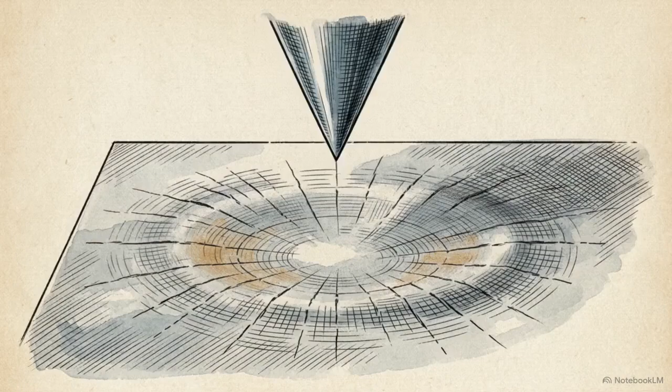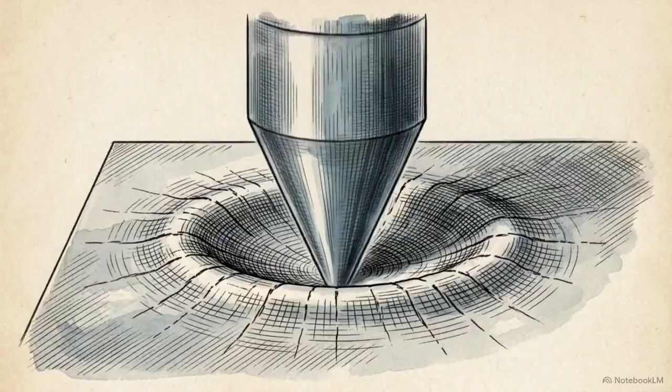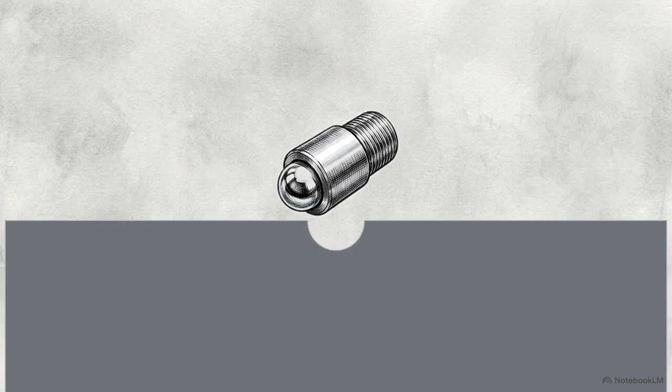In material science, hardness is defined strictly as a material's mechanical resistance to localized plastic deformation, its ability to withstand being indented or scratched. For decades, traditional testing frameworks like the Brinell and Vickers protocols were the standard methods used to quantify this resistance. These legacy methods operate by driving an indenter into a material and then calculating hardness based on the two-dimensional surface area of the resulting crater left behind.

Measuring that area requires secondary optical analysis. A technician must place the material under a microscope, measure the precise diameter of the crater, and calculate the final value. This makes the process slow, tedious, and highly dependent on human exactness.

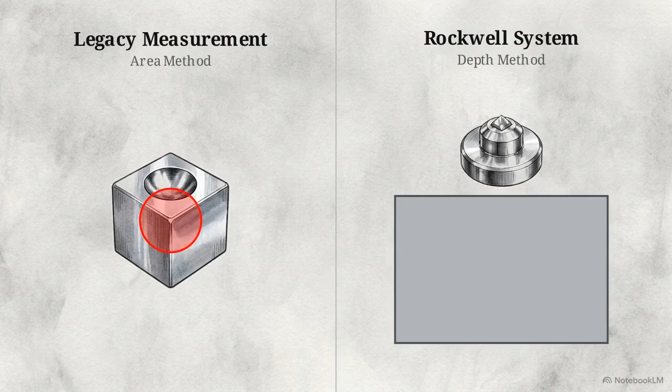The Rockwell Hardness test was engineered as a direct solution to this industrial bottleneck. This split-screen diagram illustrates the mechanical divergence. While traditional methods rely on optical area, the Rockwell system measures the linear depth of penetration. By isolating depth as the sole variable, the system allows a machine to bypass the microscope entirely and output an instantaneous hardness value the moment the test concludes.

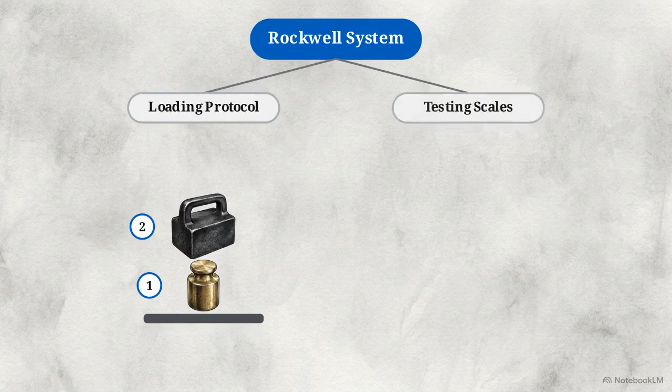Achieving that speed accurately across thousands of different materials requires complex mechanics. The system relies on a strict two-stage loading protocol and 9 distinct physical testing scales. Shifting the measurement metric from optical area to mechanical depth elevated the Rockwell test from a slow laboratory exercise into the most rapid-fire quality control tool in mass production.

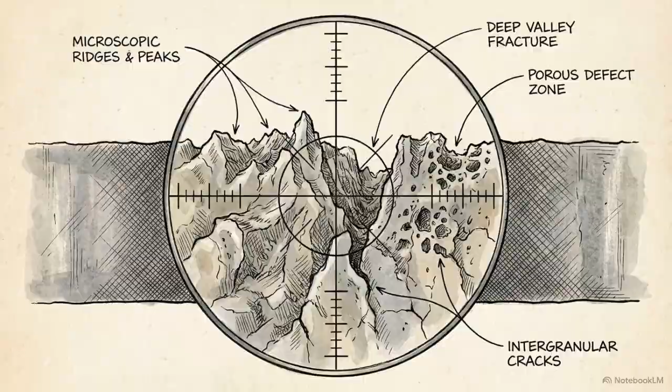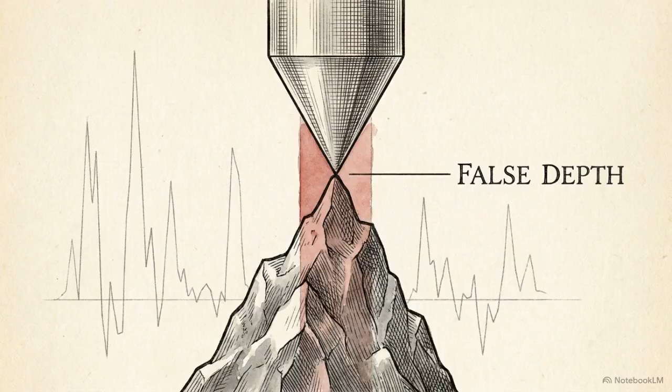Measuring microscopic depth directly introduces an immediate physical obstacle: surface roughness. Even polished metal possesses microscopic peaks and valleys. If a machine were to measure depth from the very top of a microscopic peak, the resulting hardness value would be wildly inaccurate. The Rockwell protocol corrects for this through Step 1, the application of a preliminary minor load, calibrated precisely to 10 kilograms of force.

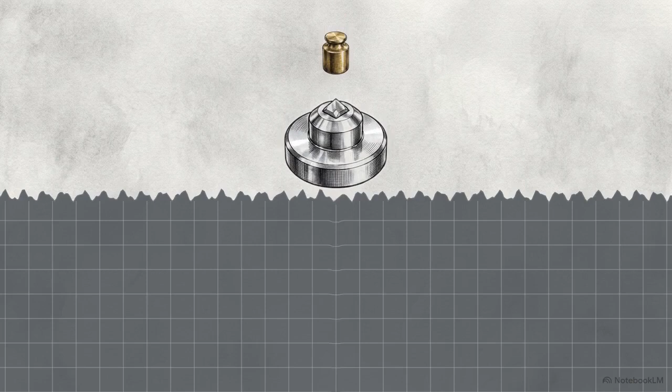This cross-sectional diagram shows the mechanical purpose of the minor load. It crushes through those microscopic surface imperfections to establish a flawless preloaded baseline. This straight baseline is the zero datum line, the verified starting point.

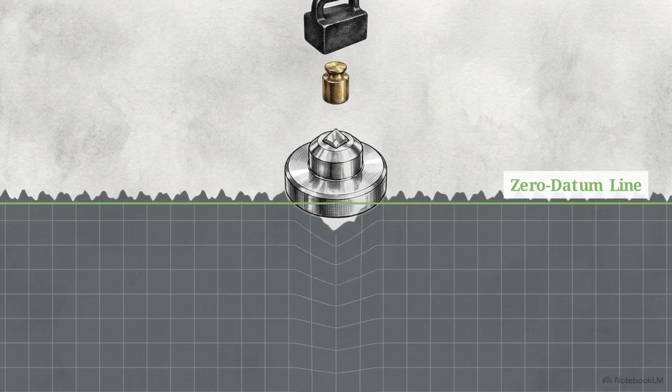Next is the major load. Up to 150 kilograms of force drives the indenter deep into the material's internal lattice structure. This major load induces the true permanent plastic deformation of the target material.

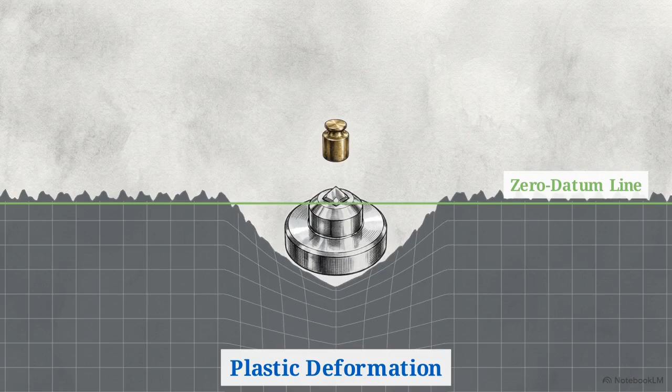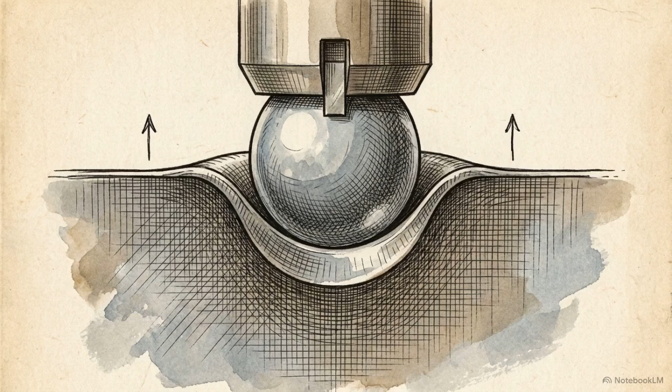In Step 4, the major load is removed, but critically, the 10-kilogram minor load remains applied. Removing the major load allows the material to undergo elastic recovery. It naturally springs back upward slightly. By waiting for this rebound, the machine isolates only the permanent plastic deformation.

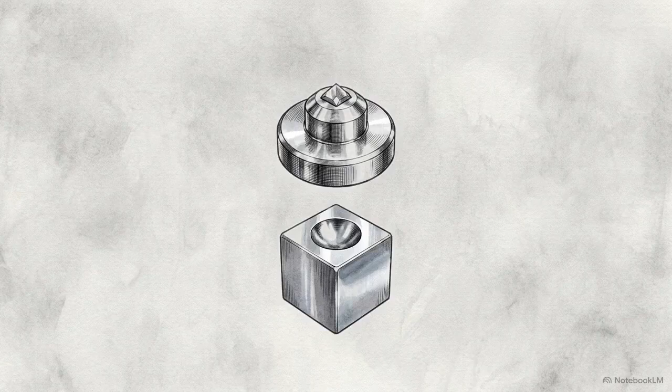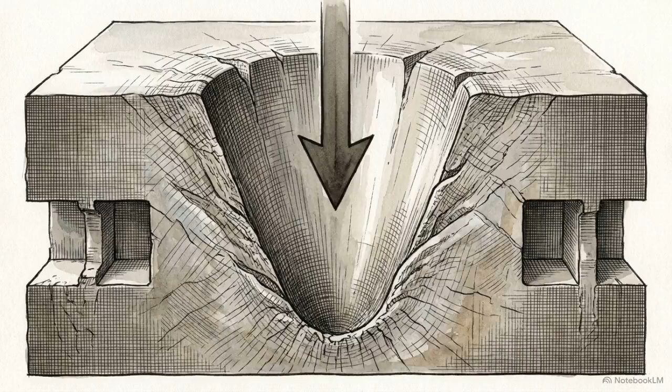Finally, in Step 5, the machine calculates the total vertical distance the indenter traveled between the initial zero datum line and the final resting depth. The reading is governed by an inverse physical law. A deeper penetration indicates a softer material. Conversely, a shallower penetration yields a higher number, indicating a harder material.

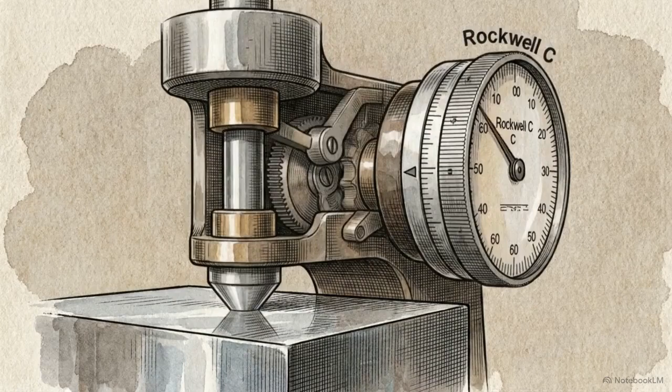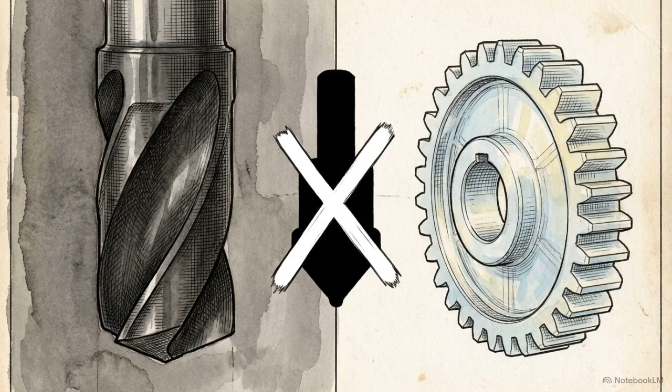The efficiency of the Rockwell protocol lies in mathematically isolating permanent structural deformation from irrelevant surface errors, using this highly regulated two-step sequence. A secondary mechanical problem arises: you cannot use the exact same indenter and force to test both a brittle carbide tool and a soft plastic. Applying maximum force to brittle materials causes catastrophic shattering. Conversely, using a sharp diamond indenter on soft metals causes complete puncture, rendering the test useless.

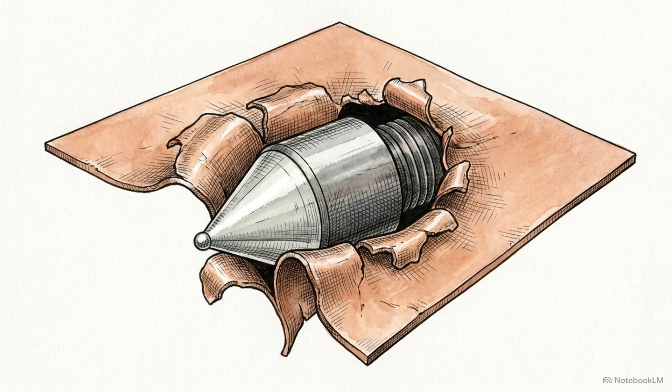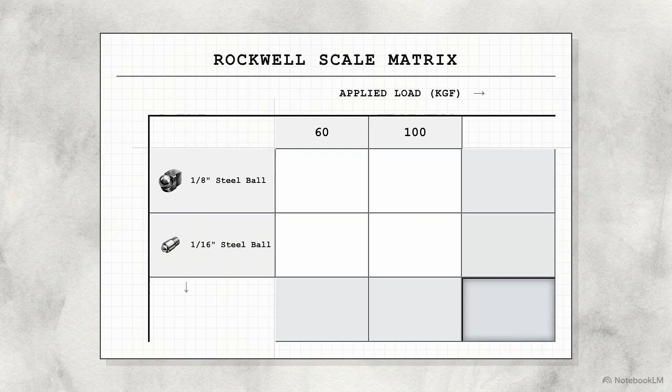The solution is the Rockwell scale matrix. The matrix consists of two key variables: applied load force on the x-axis and indenter geometry on the y-axis. The intersection of the diamond cone and the 150-kilogram load creates the standard scale, HRC. HRC is the heavy-duty standard explicitly reserved for hardened steel, heavy gears, and industrial dies.

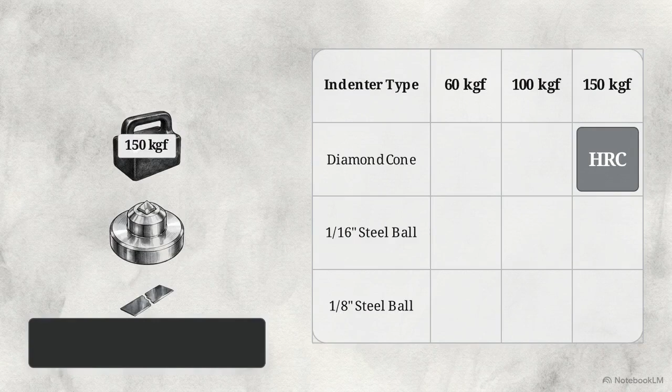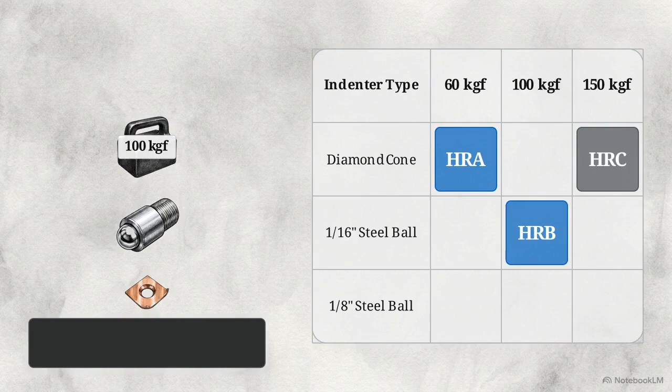However, testing a thin carbide blade with the extreme HRC load would crack the specimen instantly. Dropping the load to 60 kilograms while keeping the diamond indenter creates scale A, or HRA, calibrated for brittle materials. If we test soft aluminum sheet metal, the sharp diamond point would pierce right through the specimen, regardless of load. Swapping the diamond for a blunt 1/16-inch steel ball and applying a 100-kilogram load establishes HRB, the solution for yielding soft metals.

The remaining permutations cover the extreme edges of material vulnerability. Combining the 1/8-inch ball with 100 kilograms gives us HRE for cast iron, while pushing the load up to 150 kilograms creates HRK, tailored for plastics.

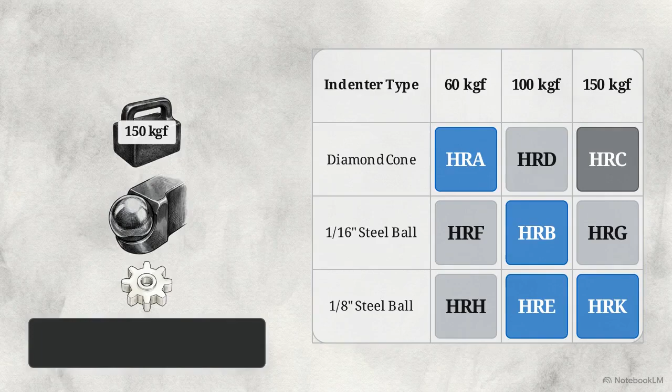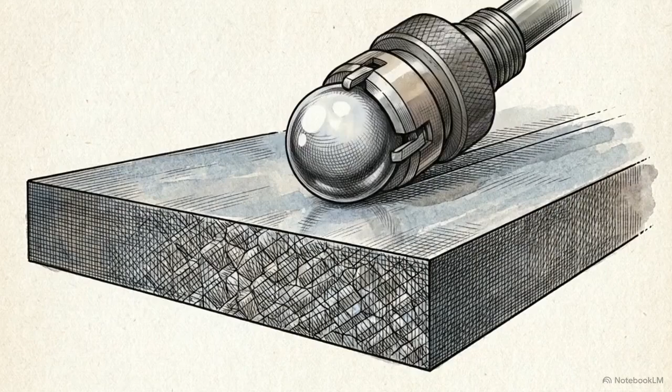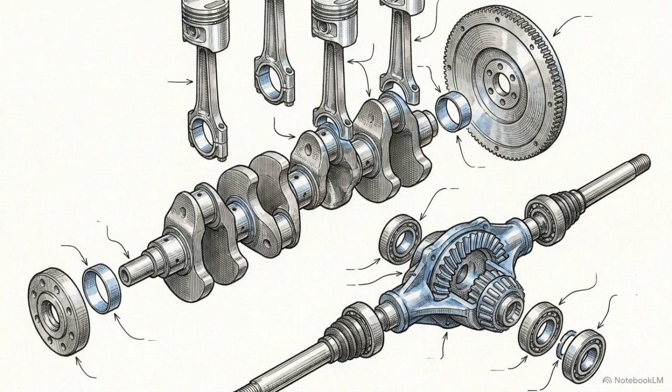An HRC or HRB rating is a declaration of the specific, tailored physical constraints required to successfully test a material without destroying it. These specific scales dictate structural survival on the manufacturing floor, particularly in metallurgy, where metals are tested immediately following intense heat treatment processes. In the automobile industry, Rockwell testing ensures that critical engine parts, axles, and crankshafts can withstand high torque without shearing. In the tooling industry, it verifies that drill bits and milling cutters possess a hardness rating strictly superior to the materials they are designed to cut.